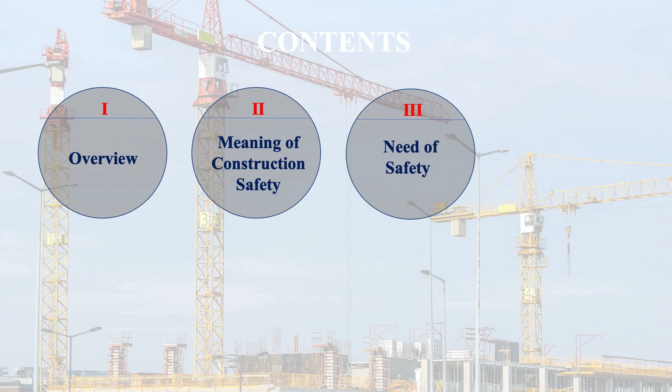In this discussion, I'll cover the overview of safety in the construction industry, meaning of construction safety, need of safety, regulatory jurisdiction, project factors that influence safety, and causes of accidents.

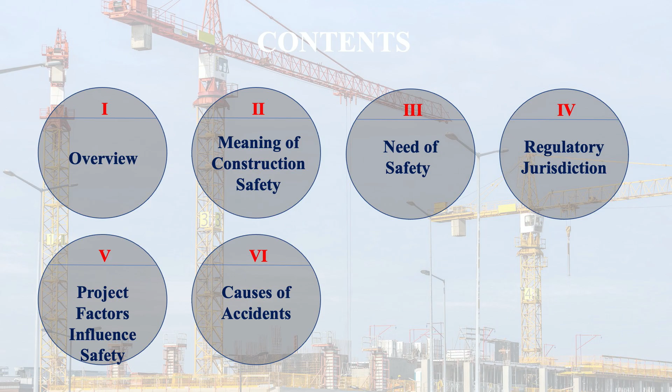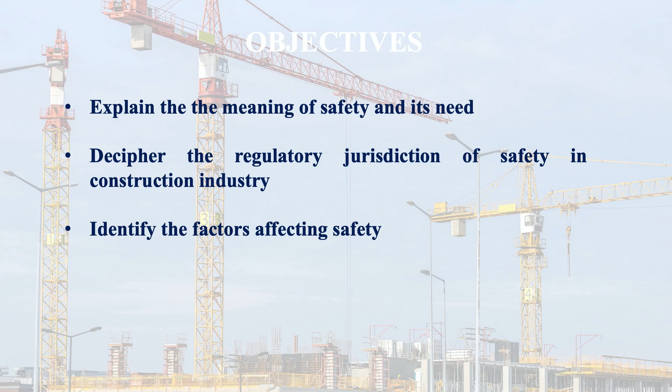The learning outcome for this video will be that after going through this video, you should be able to explain the meaning of safety and its need, decipher the regulatory jurisdiction of safety in the construction industry, identify the factors affecting safety, and explain the causes of accidents.

Let us begin with safety and its importance. Working environment of a workman can be termed as safe when effective measures have been taken to guard him or her and others present in the work area from sustaining any physical injury or other impairment. Safety of a workman can be defined as maintaining a safe working environment, because a safe working environment can ensure safety of the workman. Maintaining a safe working environment not only requires total commitment of the higher management or the site in charge, but the workmen also, because whatever safety arrangements are made by the management, if workmen are not cautious, accidents are bound to happen.

In the construction industry, safety assumes additional importance since working conditions can be very dangerous. The workmen are often required to perform hazardous tasks and risky maneuvers, which can result in a host of maladies ranging from a minor injury to a lifelong physical impairment or even death. General health can also be affected on a short or long term.

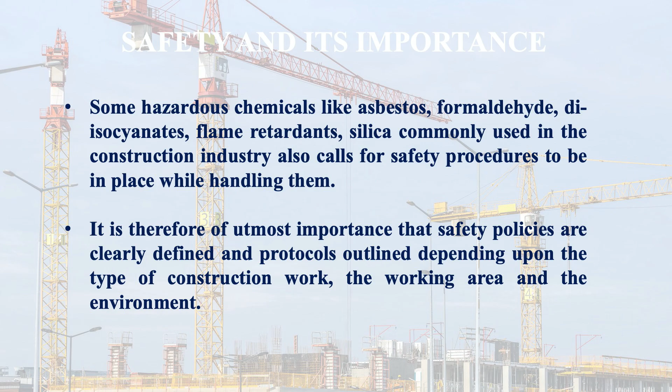It is therefore of utmost importance that safety policies are clearly defined and protocols outlined depending upon the type of construction work, the working area, and the environment. So this way we saw the importance of safety in construction.

Now let us see an overview of accidents in the construction industry. As per the International Labour Organization, ILO, 23 lakh workers die around the world due to work-related accidents or diseases every year. So it's a huge number that is affected by accidents or diseases. This corresponds to over 6,000 deaths every single day. So you can see how dangerous procedures are in the industry, and if workmen are not cautious, then what can happen - on average around 6,000 deaths every single day throughout the world.

Worldwide, there are approximately 34 crore occupational accidents and 16 crore victims of work-related illness. So you see the importance of safety - if we take proper safety measures, then we can avoid many accidents and much work-related illness.

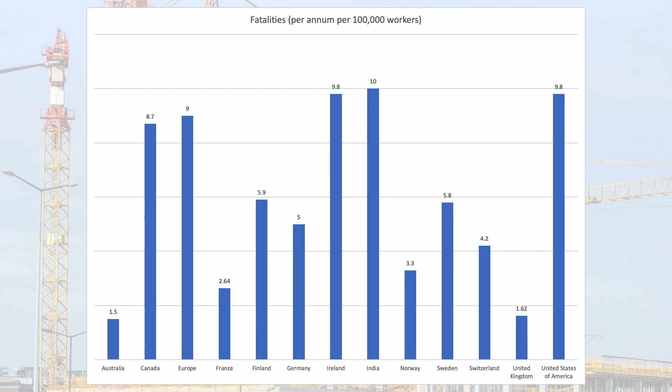Here you see the comparison of fatalities per annum for 100,000 workers for different countries: Australia 1.5, Canada 8.7, Europe 9, France 2.64, Finland 5.9, Germany 5, Ireland 9.8, India 10 - the highest, Norway 3.3, Sweden 5.8, Switzerland 4.2, UK 1.62, and USA 9.8. So the fatalities per annum per 100,000 workers is highest in India. This comparison shows that the safety performance of construction industry in India is poor compared to UK, Singapore and Taiwan.

These facts must draw the attention of various stakeholders of the construction sector and motivate them to create safe workplaces and thus save the lives of workers. This is the importance of safety in the construction industry.

Now let us see what is the meaning of construction safety. Construction sites are deemed safe when they have zero lost time injury, because a high fatality rate indicates that non-fatal injuries are also proportionally high in the construction industry in India.

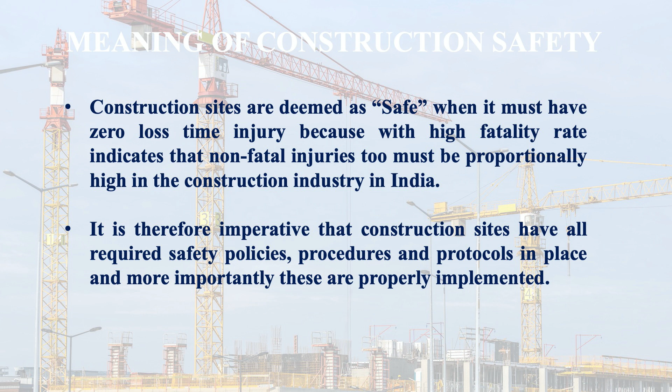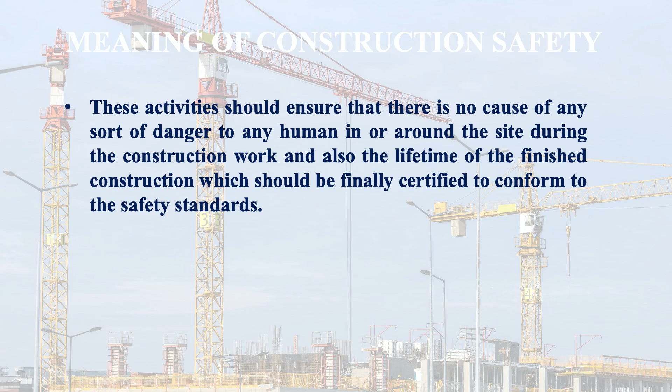It is therefore imperative that construction sites have all required safety policies, procedures and protocols in place, and more importantly, these are properly implemented. These activities should ensure there is no cause of danger to any human in or around the site during construction work, and also during the lifetime of the finished construction, which should finally be certified to conform to safety standards.

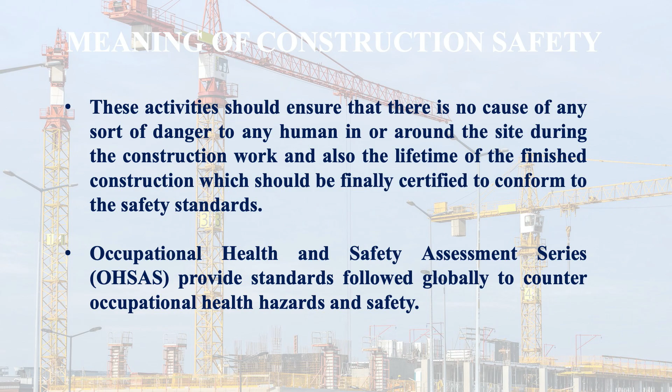Occupational Health and Safety Assessment Series, OHSAS, provide standards followed globally to counter occupational health hazards and safety. To implement and monitor safety in construction work, OHSAS is a very effective management system, originally developed in UK.

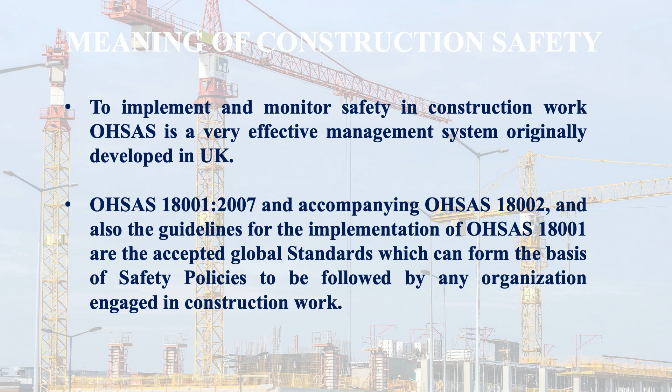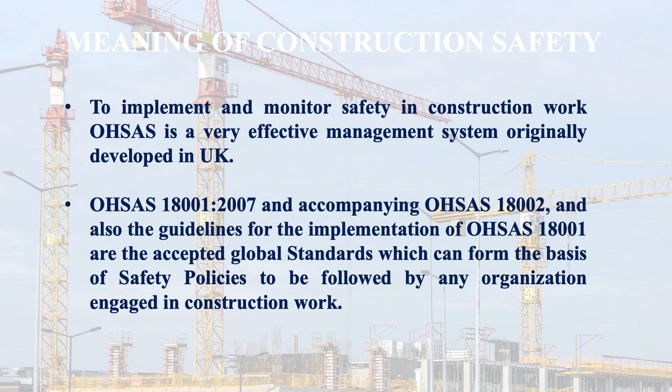OHSAS 18001-2007 and accompanying OHSAS 18002, along with the guidelines for implementation of OHSAS 18001, are the accepted global standards which can form the basis of safety policies for any organization engaged in construction work. From March 2018, OHSAS 18001 has been replaced with ISO 45001, the first international standard for occupational health and safety management system. This is the new system being followed now.

Now let us talk about the need for safety. I discussed the background about the importance of safety and the scenario of accidents throughout the world and in our country, especially in the construction industry. Now let us discuss the need for safety.

The construction industry, compared to other industries in India, is inherently prone to injury and illness due to the nature of work involved, resulting in higher rates of impairment to the person concerned. Being second only to agriculture in economic scale and being a labor-intensive industry, accidents and injuries to the human workforce in the construction industry are considerably higher in proportion to other industries.

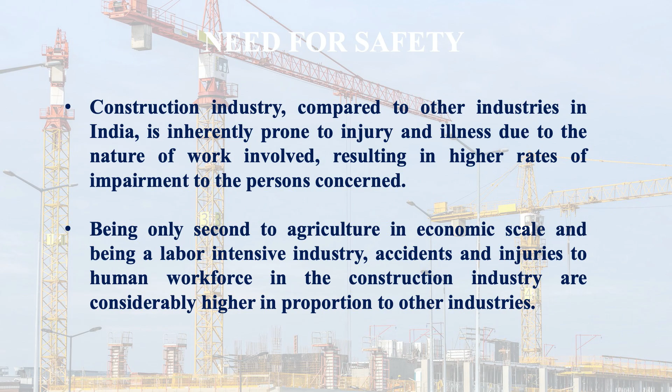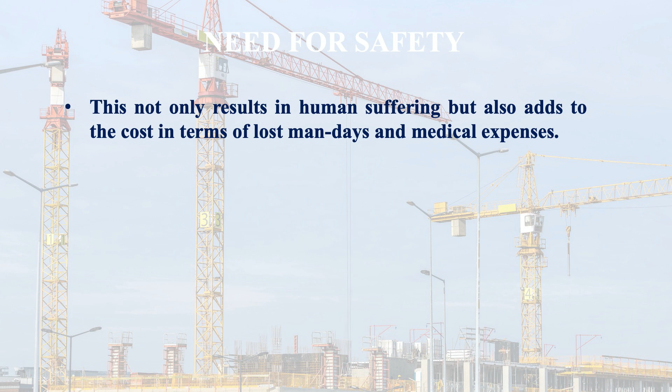This not only results in human suffering but also adds to the cost in terms of lost man days and medical expenses. It is therefore imperative that proper safety practices are put in place in the construction industry to ensure safe and healthy working conditions, leading to less human suffering and waste of capital.

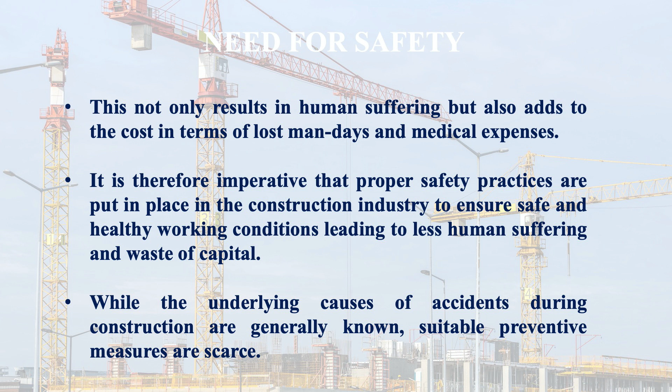While the underlying causes of accidents during construction are generally known, suitable preventive measures are scarce - that is the problem. To alleviate the construction industry workforce from this situation, we need effective safety policies following international standards and implement them with diligence.

Now let us look at what regulatory jurisdictions and regulatory measures exist for implementation of safety at workplaces. The starting point to ensure safety in construction activities is to strictly implement the various regulations that exist in the jurisdiction of the place of work. These include local, state, and central regulations that need to be strictly enforced to achieve a safe working environment for the construction work being carried out.

Typical safety requirements for individual sites are also to be carefully thought out and implemented.

Here is a list of some acts and regulations in India related to safety. First is the Building and Other Construction Workers Regulation of Employment and Conditions of Services Act 1996 and rules. Next is the Indian Boilers Act 1923 and rules. Another is the Workmen's Compensation Act 1923. Then the Petroleum Act 1934 and rules. Another is the Factories Act 1948 and rules.

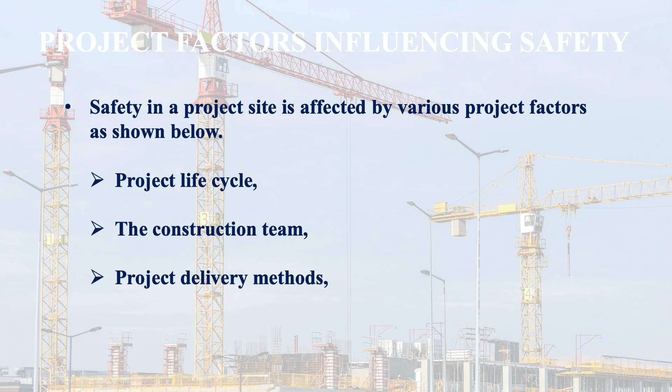Now let us see what factors influence safety. Safety on a project site is affected by various project factors as shown here. First is project life cycle, then the construction team, then project delivery methods. Apart from the factors mentioned here, safety consciousness is the most important factor influencing safety working conditions in a construction project. This consciousness about safety has to be present or inculcated right from the top management to the ground workman level.

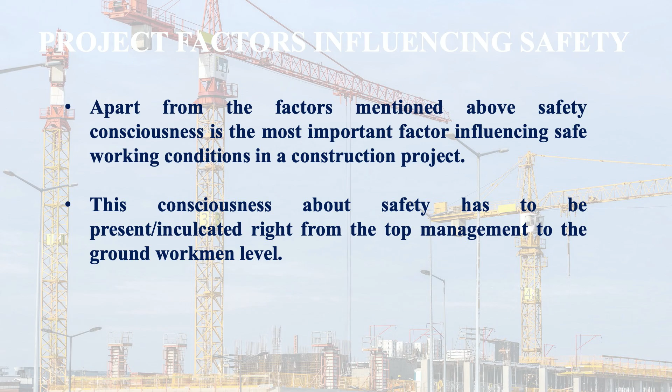Now let us see what is an accident. You can define an accident as an unforeseen and unwanted incident usually resulting in damage to property or injury to humans or both.

Accidents are defined as an unplanned event which results in injuries, fatalities, loss of production, or damage to property and assets. So this is the definition of accident.

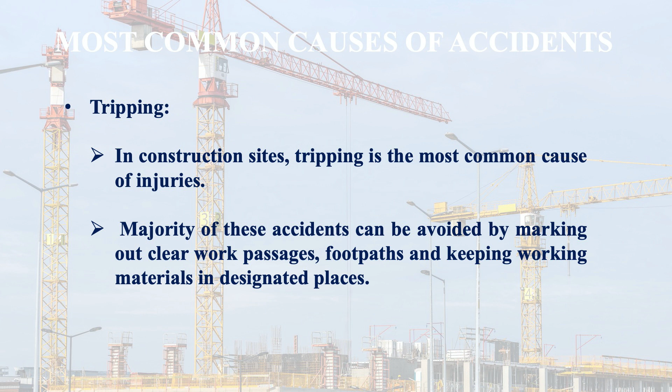Let us see the most common causes of accidents. First is tripping. In construction sites, tripping is the most common cause of injuries. Majority of these accidents can be avoided by marking out clear work passages, footpaths, and keeping working material in designated places.

Next is falling. Working at elevated heights without proper safety equipment or safe working attachments often leads to grievous or fatal injuries to the workman.

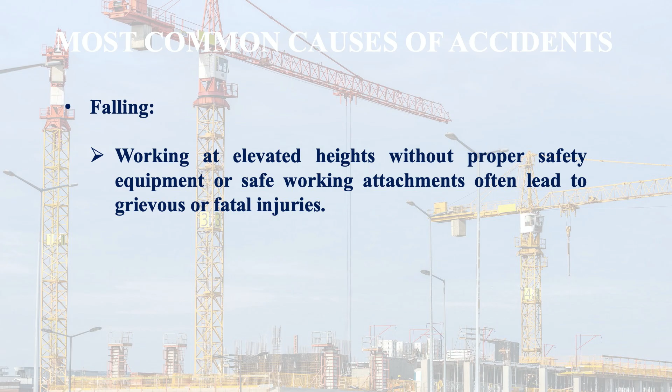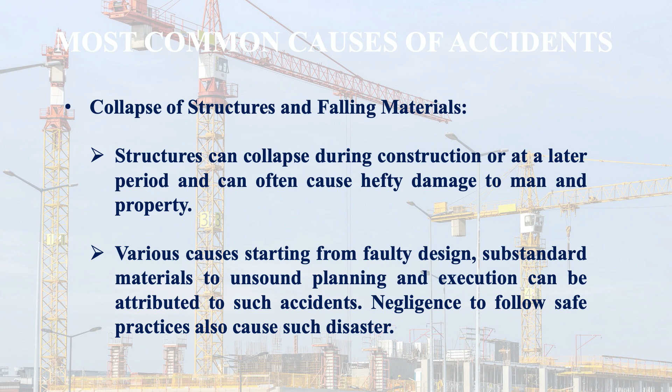The next is collapse of structures and falling materials. Structures can collapse during construction or at a later period and can often cause hefty damage to man and property. Various causes, starting from faulty design, substandard materials, to unsound planning and execution, can be attributed to such accidents. Negligence to follow safe practices also causes such disasters.

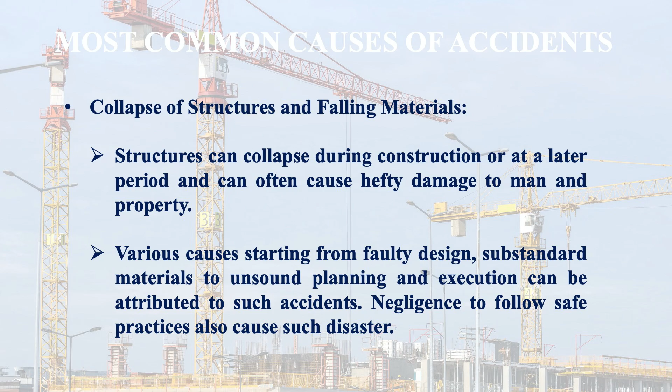Then mobile equipment. In construction activities, heavy vehicles like cranes, dumpers, and dozers are used, which often cause accidents either due to bad working conditions like muddy, uneven or soft ground, poor visibility, or due to negligence in observing safe practices.

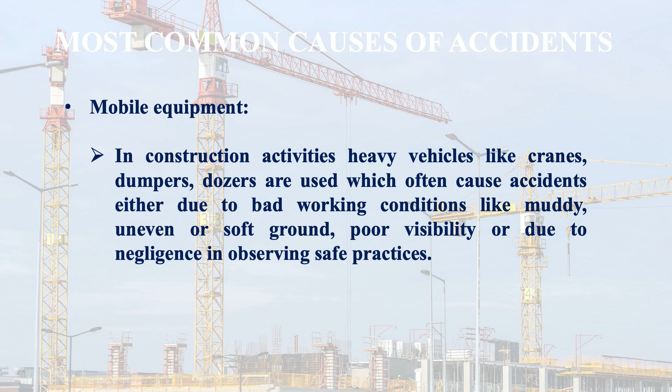Then another factor is electrical shock. Workmen can be partially or fatally injured from electrical shock when they accidentally come in contact with live overhead electrical lines or buried cables. An accident may happen.

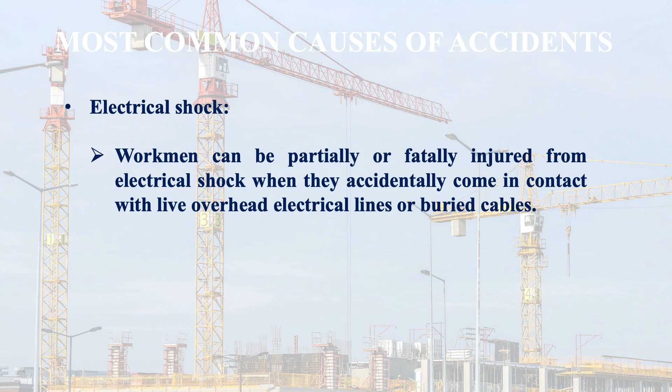Then unsafe acts: entering an area marked as unsafe without protective gear, working without training and authority, failure to use or wear personal protective equipment, using defective equipment, removing safety devices like guards for convenience of working, failure to warn others of danger, and leaving equipment in an unsafe condition.

Then faulty use of equipment, overloading or faulty loading of vehicles, failure to lift loads correctly, faulty or no maintenance of heavy mobile equipment used at the site, smoking in prohibited areas, drinking alcohol or using drugs during work. These are the unsafe acts which may lead to accidents.

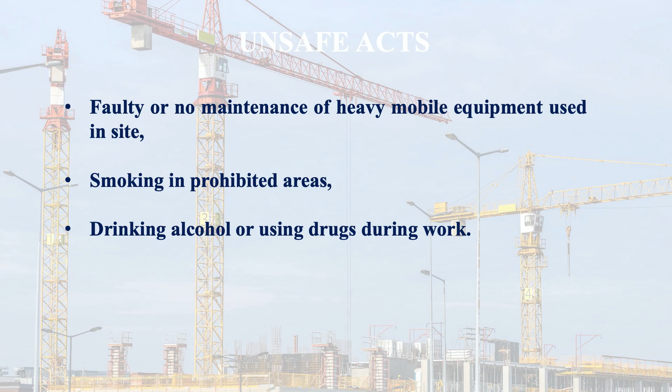Then unsafe conditions. What are unsafe conditions? Fire hazards without proper warning and prevention methods, hazardous environmental conditions, inadequate light in working area, unsuitable or defective tools and equipment, moving parts of machines not provided with proper guards, platform guardrails defective or missing, noise pollution, and improper housekeeping. These are unsafe conditions.

Then there are secondary causes of accidents also: proper quality control systems not in place, guiding quality standards not available, lack of commitment from management and workforce, improper risk assessment and inadequacy of knowledge, and management pressures for faster completion of jobs.

Another cause is financial restrictions leading to inadequate safety equipment and procedures, inadequate training and awareness on unsafe conditions, very important. Often prevalent practices and attitudes in society can also be the reason for accidents.

In India, safety consciousness has very little priority among workmen. This is the biggest problem. In a group of workmen, the risk-taking attitude of seniors is adopted by the juniors, and the cycle goes on. People in general resist change, and quite often unsafe practices in the industry, followed from the past, are deep-rooted. Time pressures to finish a job also result in safety being compromised.